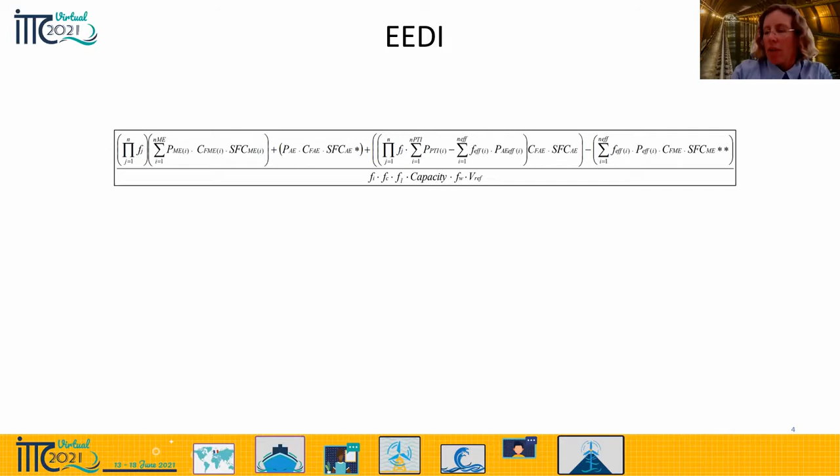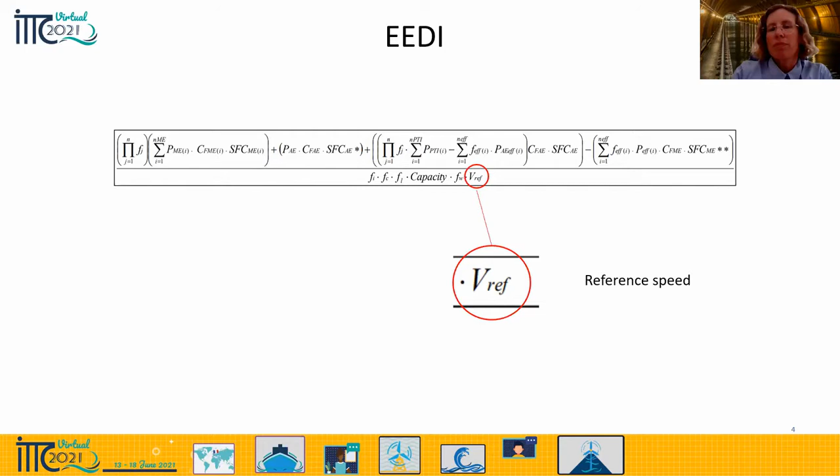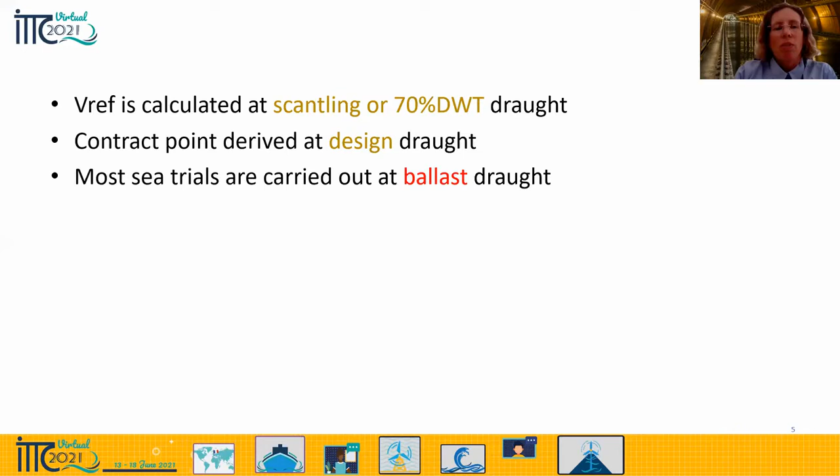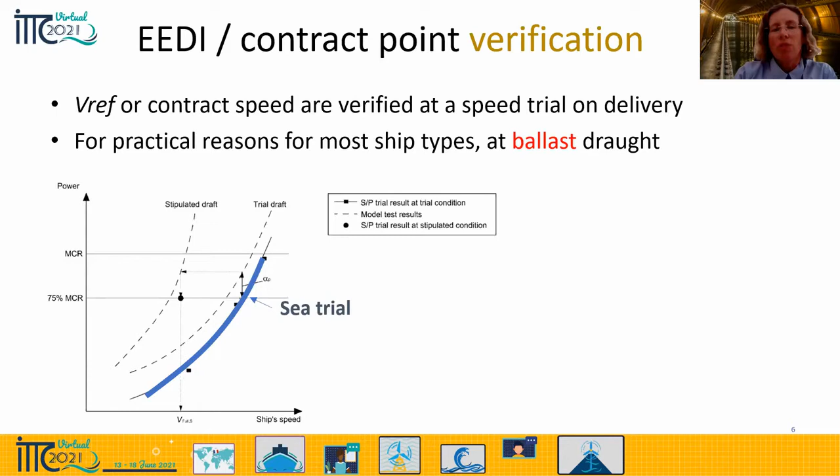The main reason why this group was established is this little term in the EEDI formula, the reference speed. The reference speed is calculated at scantling draft or another deep draft, just as a contract point is derived at design draft. But the problem is that sea trials are carried out at ballast draft for most ship types. So the verification of the EEDI or contract point is done with a sea trial at ballast draft. And the conversion to the deeper draft speed is done using model test curves at ballast and a deep draft - design draft if it's a contract, or scantling draft if it's EEDI.

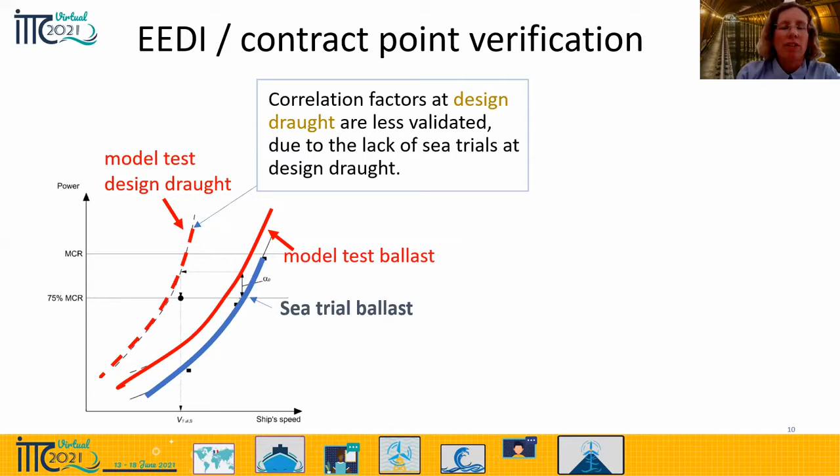At ballast draft, we have very well validated model test predictions since many years of correlation, giving correlation factors such as CA, CP, or CN. But at the deeper drafts, correlation factors are less validated, simply because there is a lack of sea trials at the deeper drafts.

But the problem is that the reference speed or contract speed really depends on the design draft curve or the deeper draft curve from model tests. So you see here, if we have another model test prediction, we will get a quite different reference speed, even though the actual sea trial is exactly the same. With two different model tests at a deeper draft curve, we get two different results.

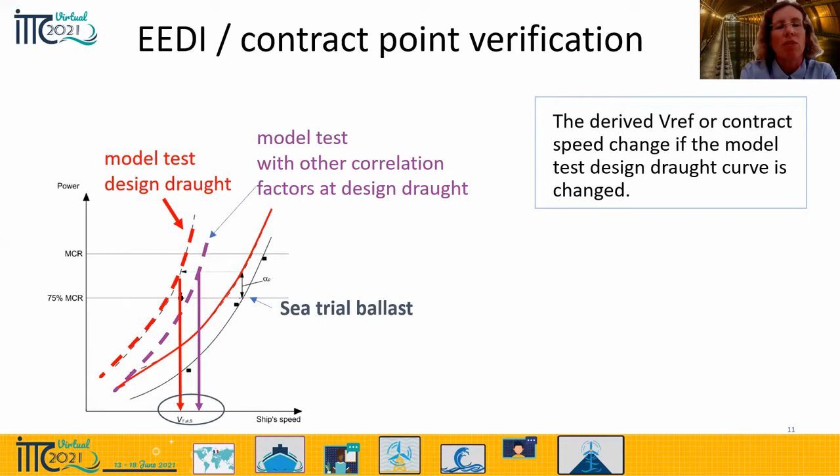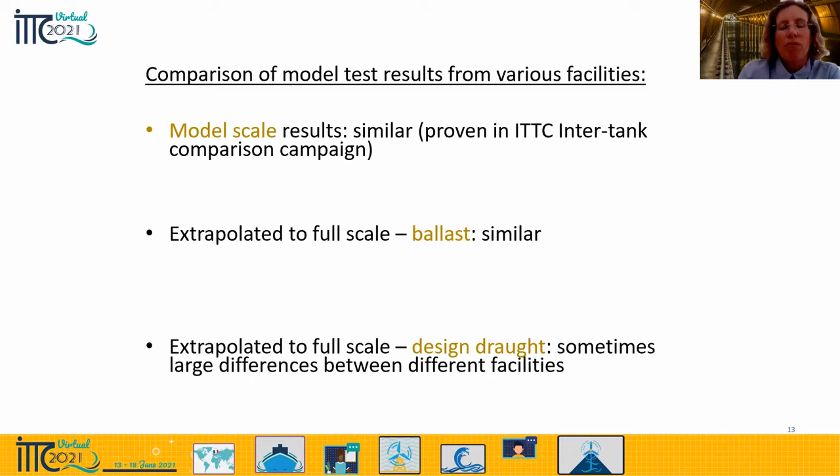When we have compared model test results from various towing tank facilities, we know that at model scale, the results are often very similar. That has been proven in earlier ITTC work. Based on experience, we also know that when we compare full-scale results at ballast draft between different facilities, they are also very similar often. But at the deeper draft - design draft or scantling draft - sometimes there are large differences between the predictions from different facilities.

As we heard in an earlier slide, at ballast draft, the correlation factors are based on many sea trials, but at the deeper drafts there are not so many sea trials available. And that is probably the reason why we have this scatter at the deeper drafts.

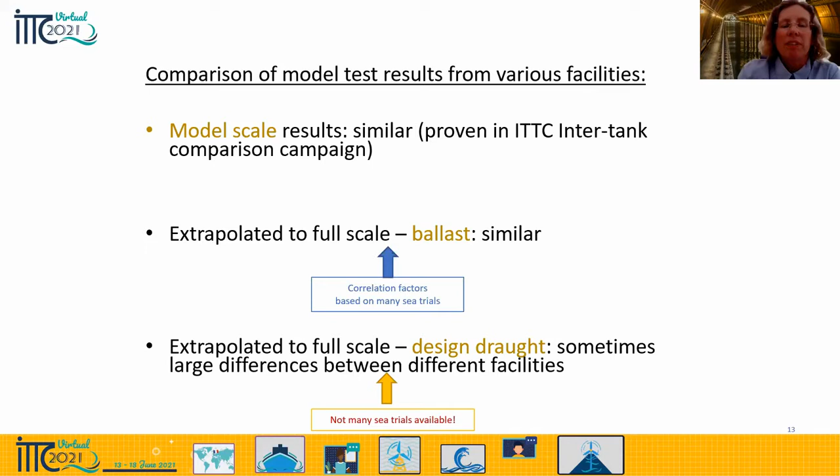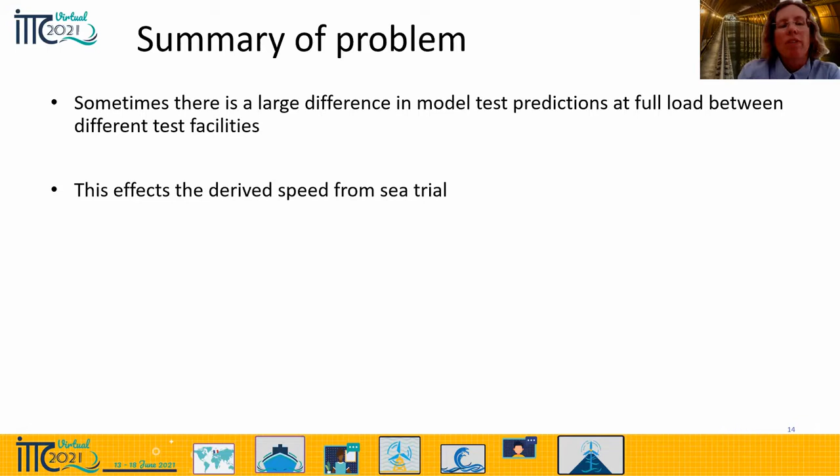So to summarize the problem, sometimes we see a large difference in model test predictions between different towing tanks at full load. And this affects the derived speed from a sea trial. And there are consequences on the EEDI value that can have a very negative impact on the whole industry.

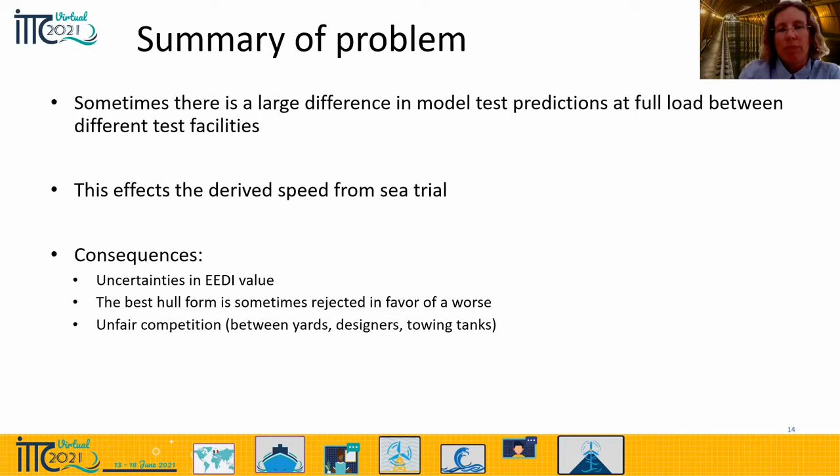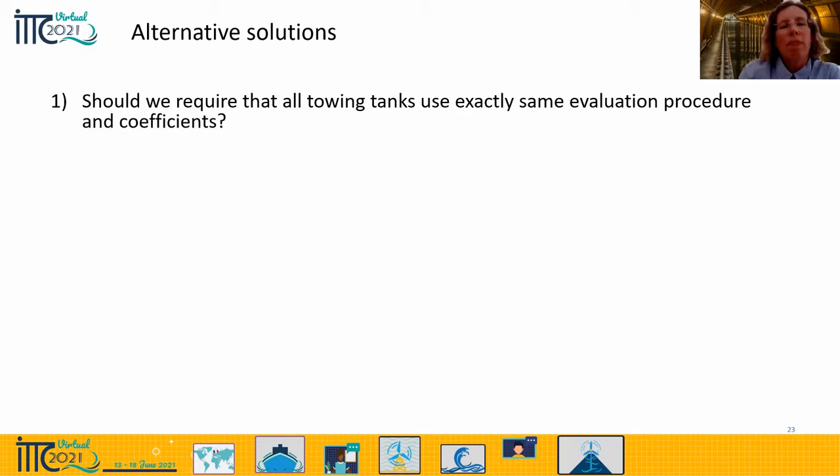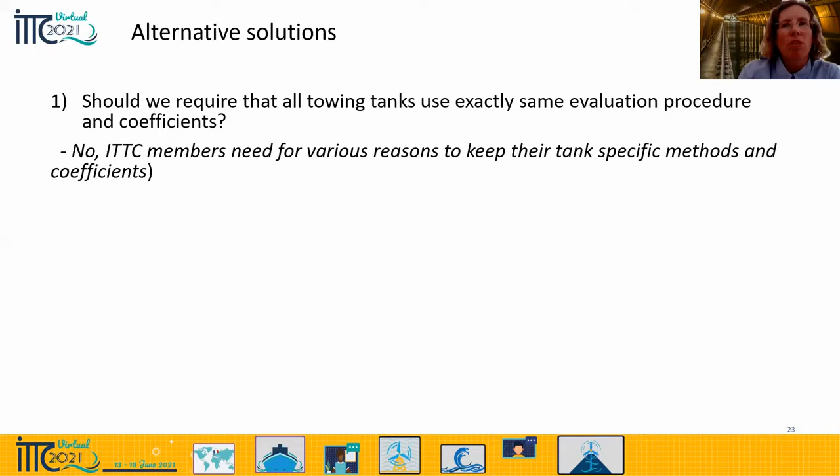So now I will discuss alternative solutions to this. Should we simply require that all towing tanks use exactly the same procedure and coefficients? The working group believes that this is not feasible, since most ITTC members need, for various reasons, to keep their tank-specific methods that fit their specific tank and database.

Should we require that each tank has correlation data from sea trials at full load? That is not feasible, as we know that there are very few such sea trials available. Should we require that each tank then use correlation data from operational data instead at different drafts? That we know is very scattered, so that's not a very good solution either.

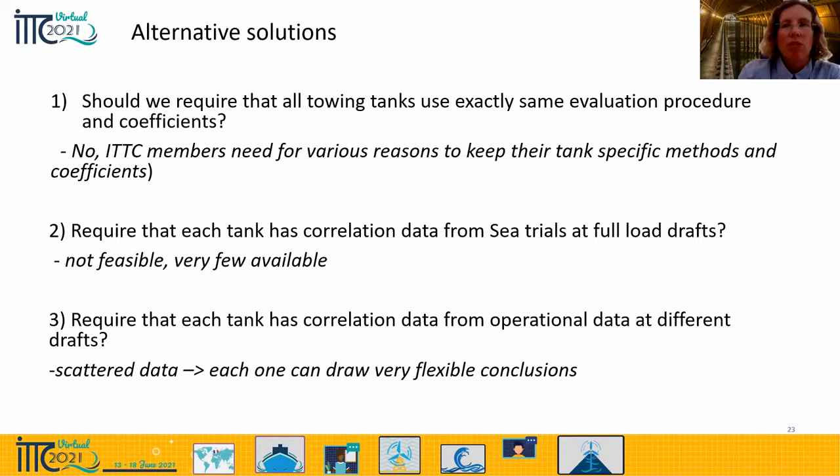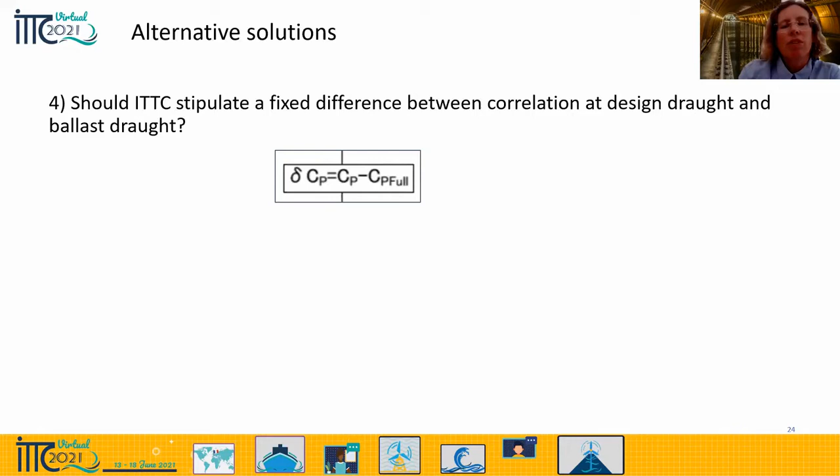Then could ITTC stipulate a fixed difference between correlation factors at the different drafts? For example, some kind of delta CP. That was explored by the last period's special committee on performance of ships in service. It's impossible to derive due to the fact that all facilities use their own settings, so this delta CP is not applicable. For more details, refer to the committee report from 2017.

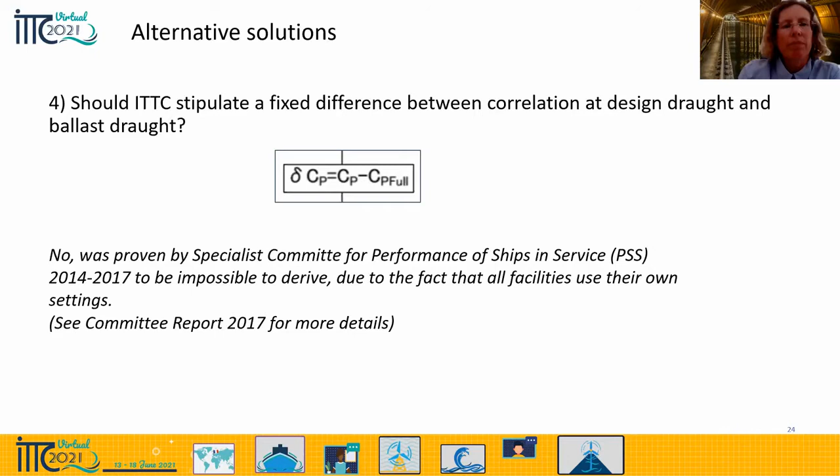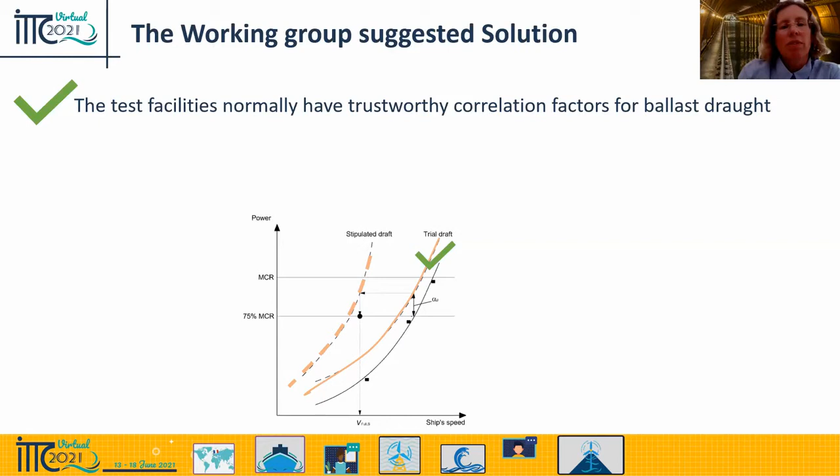So the only solution left that the working group can see and suggest is as follows. We know that at ballast draft, the correlation factors are trustworthy, but it's the relation that ITTC needs to assist with - deriving a good relation between the two curves.

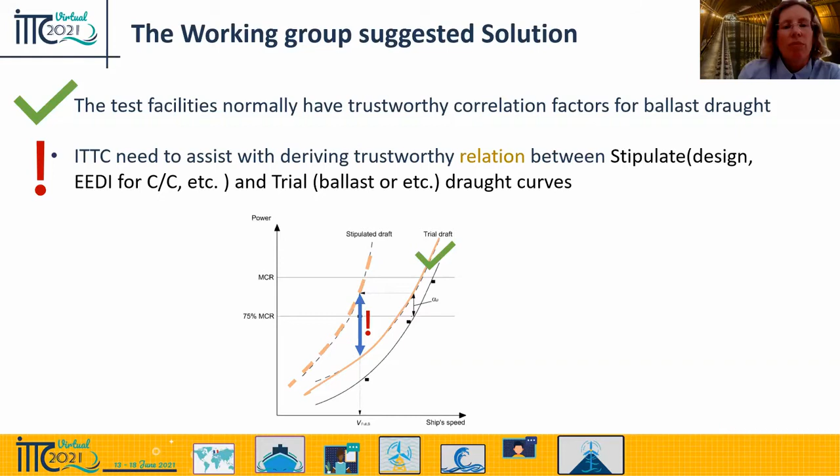The working group suggests that ITTC should provide some kind of template, and each facility should demonstrate that their correlation factors and method result in a reasonable relation between the two curves. So it's not the absolute values, but the relation.

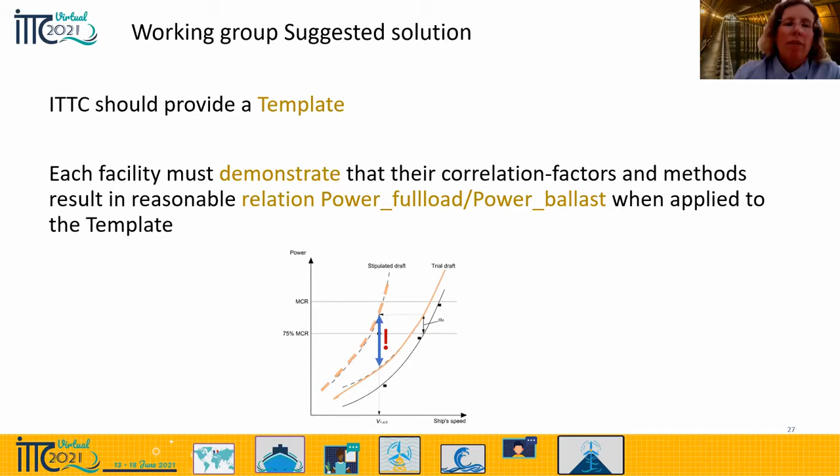This template could either be a template ship with data for a template ship, or it could be a template method. The working group has not decided which one of these to use, and that is what we will work on in the coming year.

But in any case, we need to derive this template. The suggested method is, first priority, to use sea trials at various drafts if possible. There are a few cases available, and we have already found ship owners who are willing to share data. That's the first priority, to get sea trials at various drafts.

Second priority is to use operational data, even though we know the accuracy is very low, but we will have to try this path and see if we can get any trends out of it. Then we start from an existing extrapolation method, for example the standard '78 method, and check it, or if necessary, tune the standard correlation factors so that the relation between design and ballast is as what we can see from the full-scale data we have.

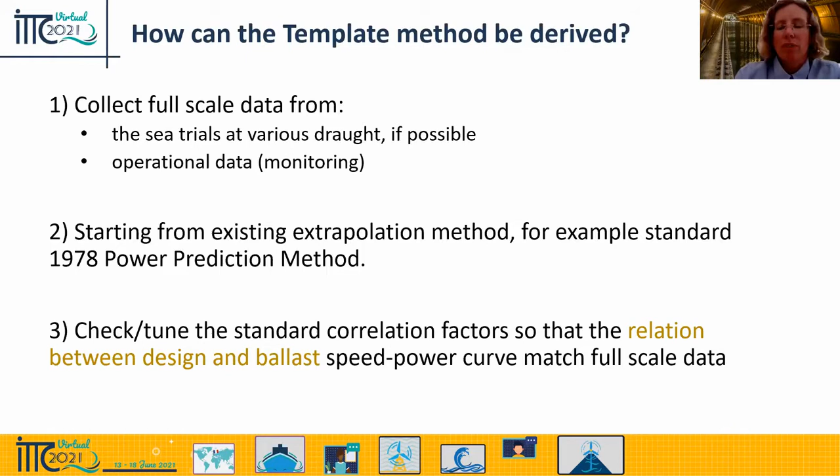We will continue to work for another year, and we really need input from the ITTC community, so I hope this group discussion can give us some guidance or suggestions. Shortly we will start with some polling questions that everyone can answer. After that, I hope you can use the chat function to provide questions or suggestions, for example whether you share our description of the problem or not, how this demonstration could be carried out, or if you have other suggestions or questions for us.